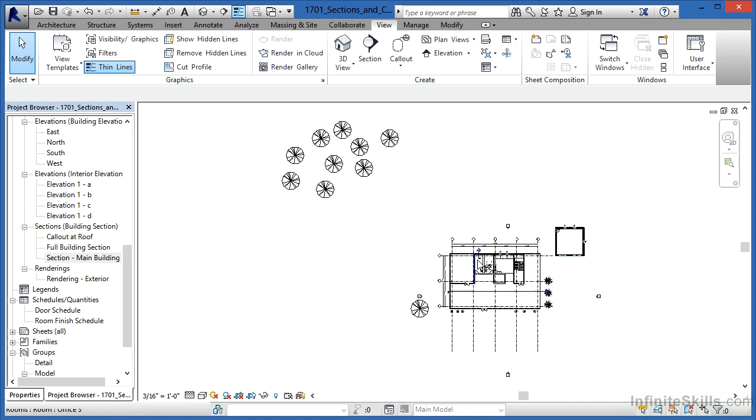Zoom in here where we have our restrooms, and you'll see that a section view symbol has already been placed. The first thing we need to do is either double-click on the circle, or under your project browser, look underneath the category of sections for section main building, and then double-click on that view. What we'll see is a cut right through this wall location.

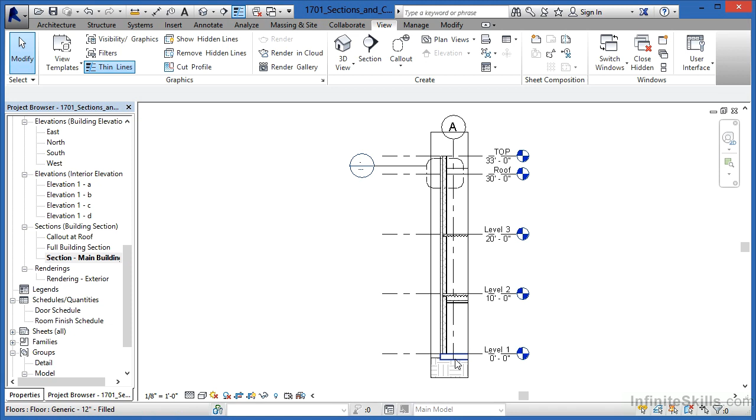Here we can see where we have the floor down below. We can begin to see the floors coming up. Right here is a roof. And we can see this is the outer wall that it's cutting through.

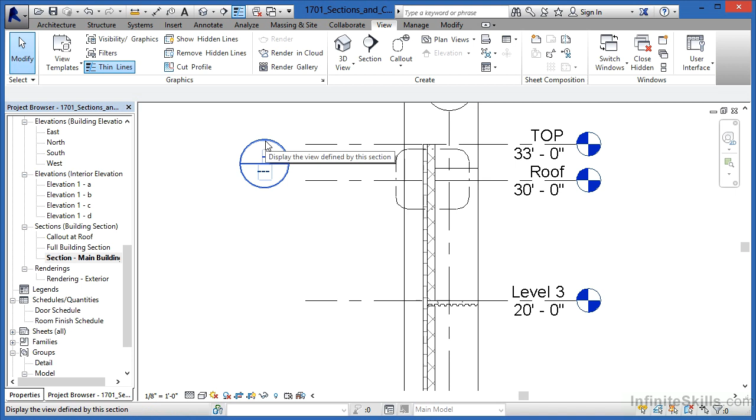This entity here with a circle with a few dashes and this line, this is what's called a callout. It's also used to create enlarged details of spaces. If we wanted to see an enlarged detail of what this looks like, highlight over the circle and either double click on that or double click where it has callout at roof. This will take you to an enlarged detail of this particular area.

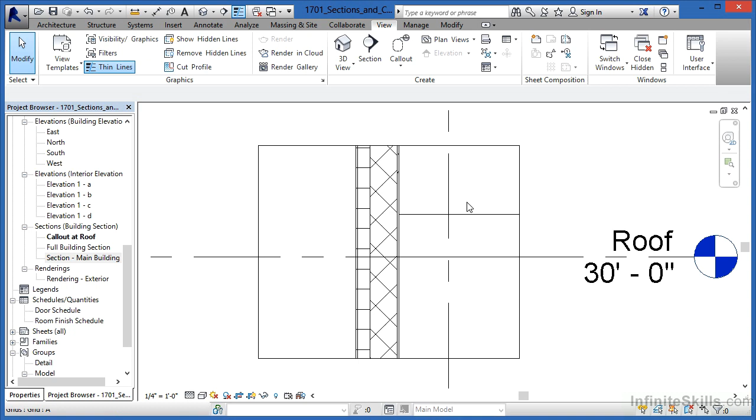What you would do in this case, once you had the enlarged detail, is come back in using drafting tools to finish it off so it's created just the way it should look as far as when the building is constructed. Now this is how we place these inside of our plans.

I'm going to click the X in the corner of each of these views until I get back to the floor plan view. Zoom out, and now let's come out to this building, that's a garage out here at the outside.

Select on the View tab, and then pick on Section. We're going to create a section through one of these walls. Make sure that Reference Other View is cleared out, so there's no check mark in there. Click once, come over again, click again.

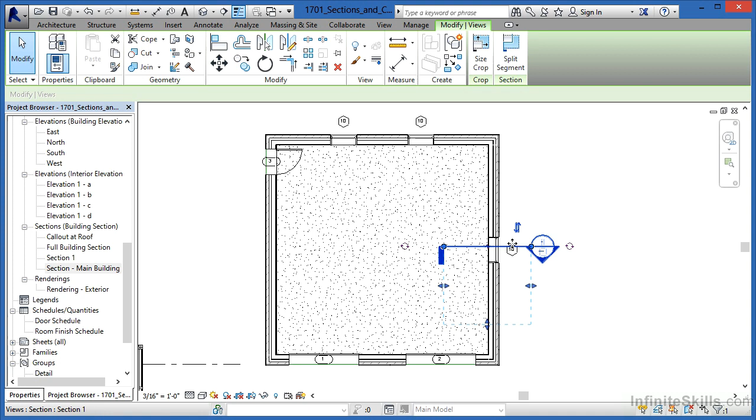Anything you want to see inside of that section view has to be inside of this dash box that we see going around the view. If we'd want this window to be inside of the view, we would have to pull this down so that the window was actually crossing over this line right here. If we don't want to see the window in the view, we would pull it up, and now the window would no longer be inside of this view.

Now to see the section itself, move over here, and then either double click where right now it says section 1, or double click where the circular part of this section symbol is at. This will take us to a section going through that part of the building.

Now that we've done that, we can look over here and see the scale is 3/16 of an inch equals 1 foot. We could change that by clicking on the scale and picking any scale we'd want off of the list. In this case, I'd like to give it a more traditional wall section scale.

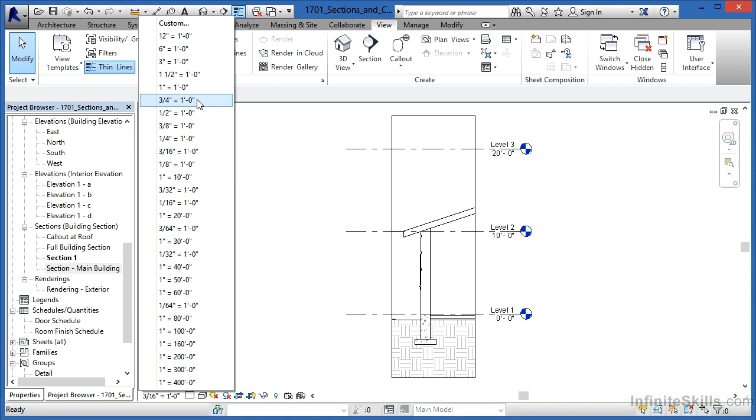I'm just going to choose 3/4 of an inch equals a foot off of the list. We couldn't see much of a change on the screen, but it did change the overall scale of everything that was drawn. Unfortunately now, we're not seeing too much detail. We're seeing some concrete pattern here, but that's about it.

Next thing I'd like to do is, right next to the scale, there's an option that says detail level, and it's currently set to coarse. Change that from coarse to a fine level of detail. Now we can see each layer of material that makes up this wall.

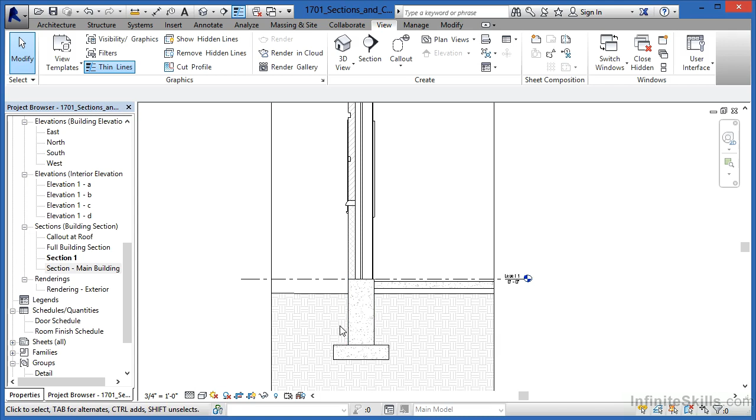Now the idea behind coarse versus fine: a coarse level of detail is great for an overall building section that just shows cutting through the building, and we don't necessarily care about how each material relates to one another. A fine level of detail, on the other hand, will let us see each layer of material that makes up items like this wall.

The next thing I'd like to do a callout of will be this location here where the wall comes up and hits the roof. To do that, underneath the View tab, we're going to select on Call Out. Click once, hold your mouse button down, then let go of the mouse button, and when you have this windowed around this general area, click again, and zoom in a little bit.

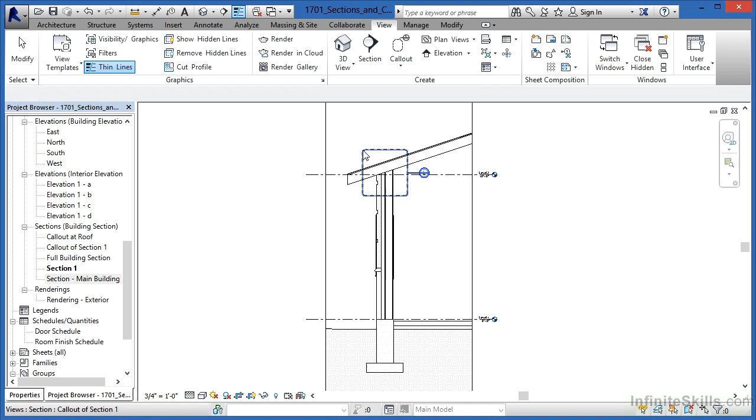What this is going to do is create what's called a call-out view just in this area. Move down, double click where the circular shape is at, and now we can see an enlarged detail of this particular area, ready for us to put in such things as maybe insulation, individual brick coursework, as well as a top plate here to support the roof on top of the wall.

So your sections and callouts, their purpose is to give us a better indication of how these walls come together, how the different materials come together, and enlarge these so we can get a fine enough level of detail that we can easily communicate the design without each of these items being too small to see.